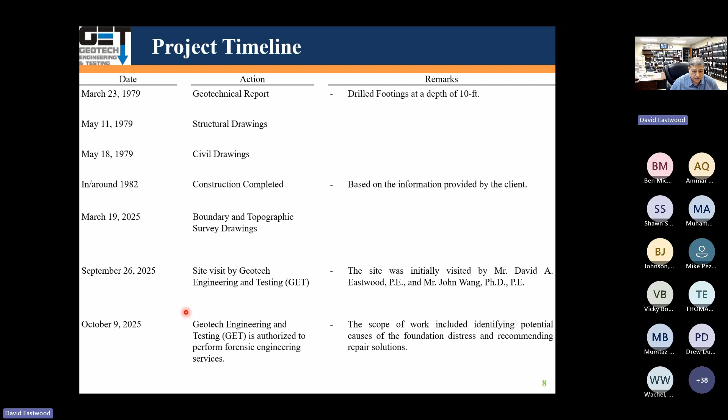There was another new boundary survey done in 2025, and we got involved because the school district came to us and said, hey, we have a lot of foundation problems, floor slab problems, a lot of cracks in our building, what's going on? So we went out there and got involved in September of 2025, and we've done site visits many times during our investigation on this project.

These are some of the pictures of the exterior of the building. Had cracks in the bricks, cracks in the concrete, a lot of separations in the joints out there. It's an expansion joint there, and you can see the joints opening up.

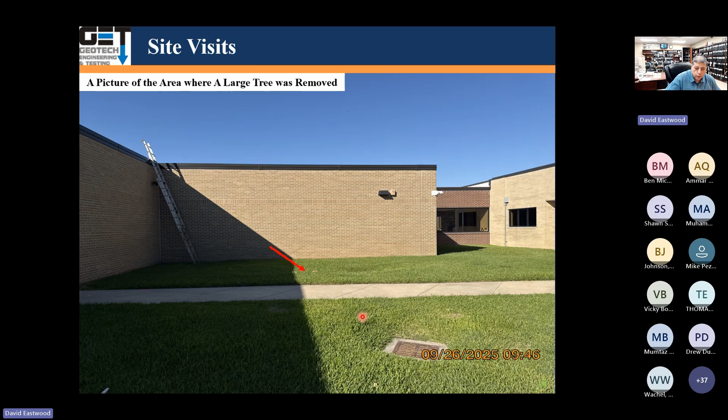There were helical piles. This school was repaired one or two times, and they used helical piles, but they did partial underpinning, so it was not very effective what they did. There was also a large tree taken out on this side of the school, towards the north side of the building. That's where the large tree was taken out.

Some of the columns in the building settled, causing a lot of cracking of the concrete. There were no isolation joints between the columns and the flat work, so there was a lot of cracking out there. That was kind of important.

A lot of the flat work around the school was pretty flat, with negative drainage towards the walls. There were a lot of trees next to the building, oak trees and pine trees. A lot of cracks in the flat work, joints separating, sidewalks settling - you can see the joints. Water was just standing in some of the paving areas due to bad drainage, with no area drains.

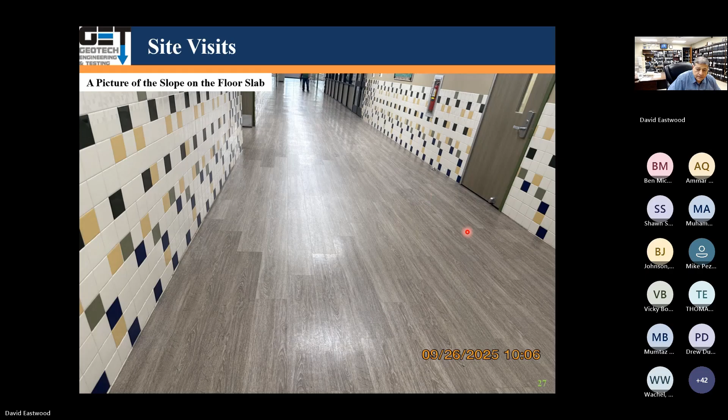Going inside the building, you look at it - the floor slabs were sloping, and there were some bumps in the floor slabs. We had floor slab covering, so we couldn't tell exactly what those bumps were. It could have been curling when they poured the concrete - we couldn't tell, but there were bumps there.

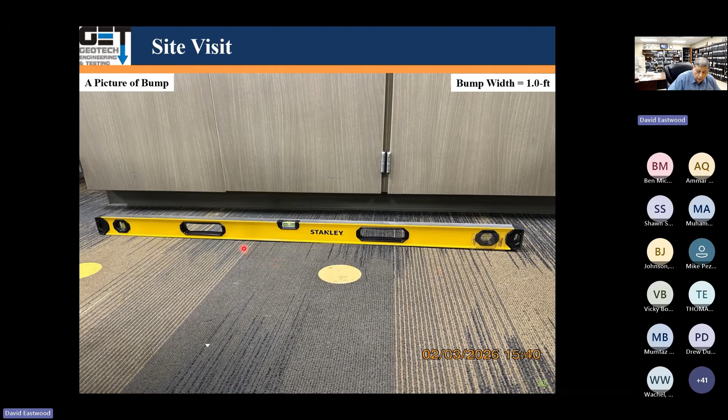You could tell where the bumps were - there was about a half-inch separation in the slab from the high point to low point over a 4-foot ruler, so you can see that's the length of a bump. Again, we put a 4-foot level there, and we could see where we had carpet and where we had these bumps - again, could have been curling.

Floor slabs were not level. This is the length of a bump across the whole classroom. Again, another bump here - you can see half an inch separation. Floor slab not level across the bump.

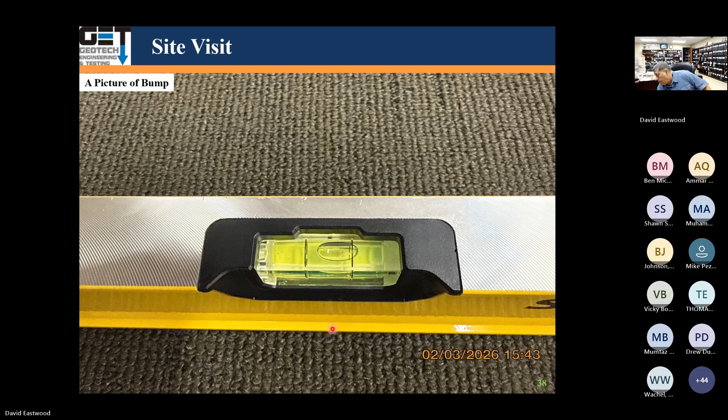You can see here the length of the bump, about 28 feet. Again, you put the 4-foot level in here, and you can see the separations from the high point. That's at various locations throughout the floor slab areas - see that over here. Here's about a 27-foot length of the bump. Here's another bump here.

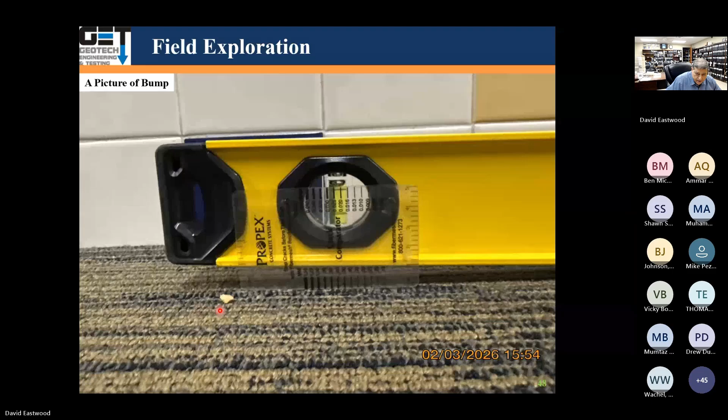The slab was not level across the 4-foot level, along the length of the bump. We had column and sheetrock cracking, and some of the columns were moving.

We had cracks in the sheetrock where the joint was, with some more movement out there at the corners, cracks over here, and more sheetrock cracking throughout the school. This is kind of like the floor slabs.

You can see drill piers. In 1982 they built this thing. I think it was in '79 that they did the geotechnical work. They set the piers, 10-foot piers, on this project.

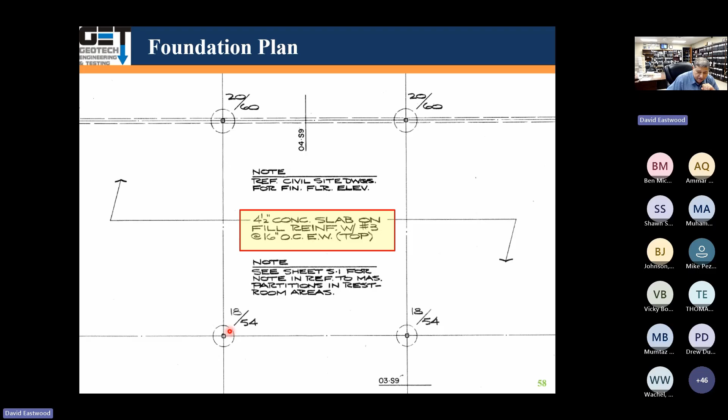The floor slab was only 4.5 inches thick, with number 3 bars at 16-inch spacing. These are 1854s, 18-inch shafts, 54-inch diameter bells, depth of 10 feet.

The initial geotechnical report said piers at 10 feet. It's a drawing, the initial drill piers, 10-foot piers. The exterior beams were supposed to be 24 inches.

For field exploration, we did some GPR, concrete coring, drilling and sampling, tree survey, macro elevations, pier exposures, test pit excavations, and crack surveys.

First thing was GPR went out there, and the GPR covered the building where we could access. We also did coring, where we did interior borings, and we did macro elevations of the school. We did 5 borings inside and then 4 borings outside.

We also exposed the piers at 3 locations: test pit 1, test pit 2, and test pit 3. Then we exposed the exterior beams at 3 locations: test pit 4 and test pit 5.

Let's see if I can find test pit 5. Here's test pit 5 and test pit 6. So we exposed the grade beams and also drilled to see what was actually built.

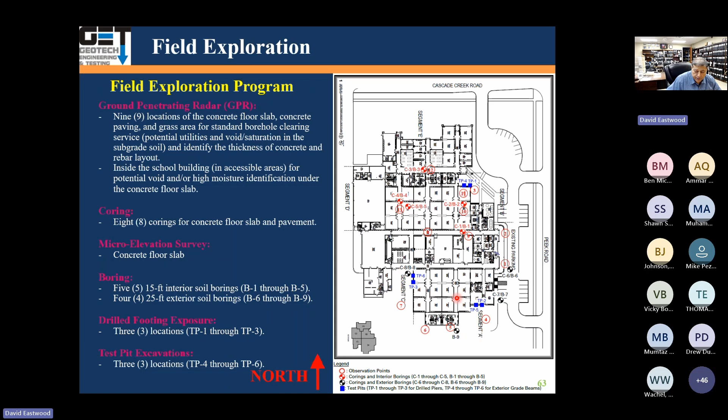GPR uses basically an antenna that transmits electromagnetic energy like a cell phone, located within the antenna. It reflects the signal when it picks up soils with different dielectric values, kind of like different properties.

We did GPR where we did our concrete coring and borings. Also, we wanted to know if there were any utilities out there, so we did GPR both inside and outside the building.

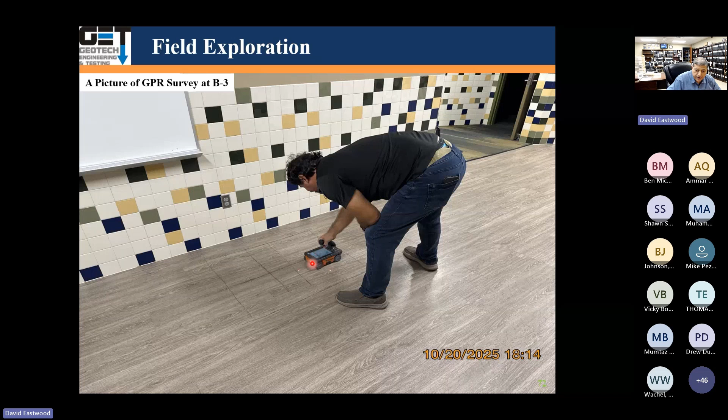This is the boring location, boring B3. These are where the steel locations are, the rebars. Of course, we didn't want to do the borings and coring where there was no rebar.

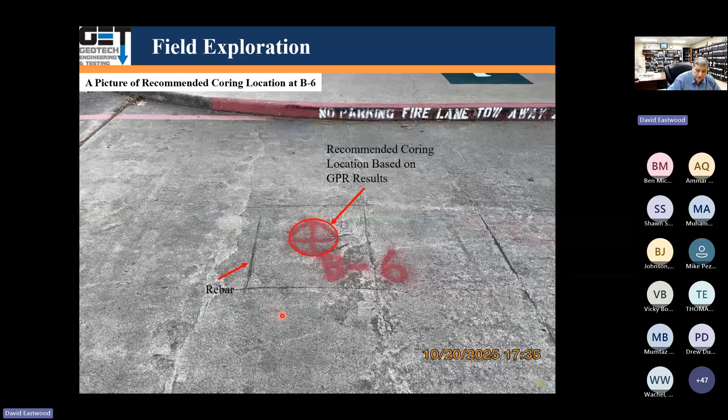B6, that's in the parking lot. Rebar locations, this boring location. That's B6, we did it over here, that's where the rebar is.

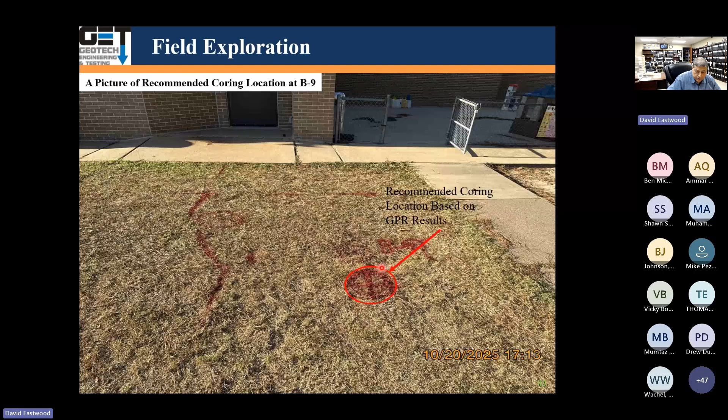We did one in the middle where there's no rebar, and one in the grass, making sure there was no utilities underneath it. That's B9. We cored the concrete inside and outside.

The concrete was supposed to be 4.5 inches. In some areas it was like 4 inches, some areas was like 5 inches, 5.5 inches.

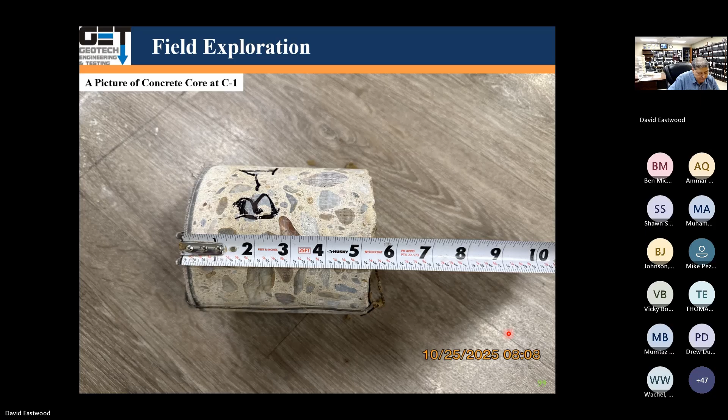We saw some voids underneath the concrete. The pad underneath the slab was like 2-3 feet thick, and the pad settled with time. The school was built in 1982, so it's pretty old - 40, 50 years old.

So with time, some of these older structures, the pads will start settling and creating voids underneath the concrete slab, and the slab starts sagging and dropping. You can see the void in the pad, the separation between the concrete slab and the pad. Here's the void.

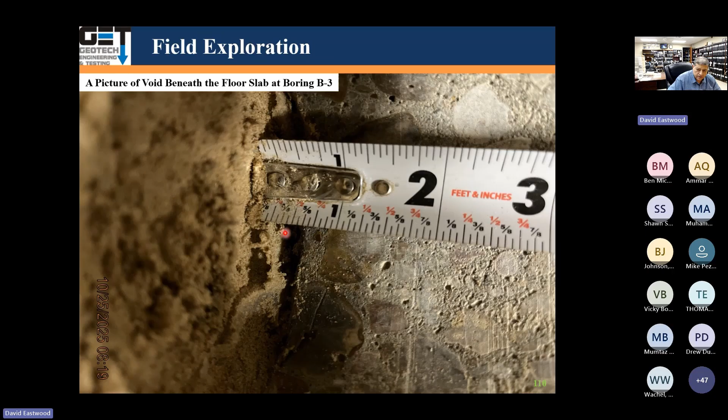There were some areas where there was no void. We got our portable rig - it's a gasoline operated portable rig that we have, and can do borings up to 20 feet deep inside the building. This is our own rig, so we get out there and do the borings, get soil samples all the way down.

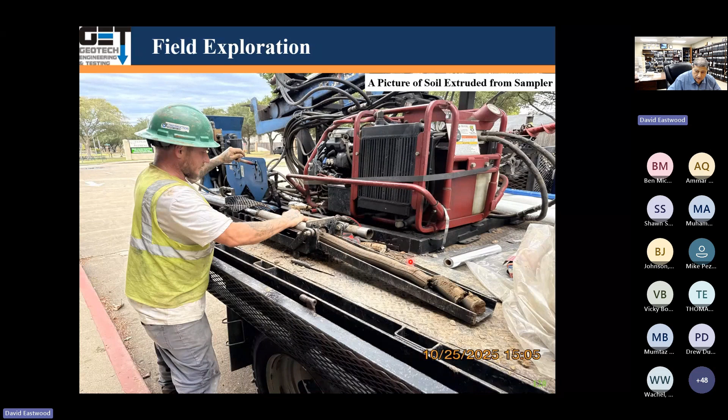We extrude the samples, the soil samples - you can see the sandy clay soils coming out. We did have some fat clays too, gumbo clays, but mostly sandy clays. We measured the water level inside with a tape measure with a weight at the end of it.

We threw it in the hole when it said plumb - that's where the water was, but we didn't find any water in any of the borings where we did. No groundwater. We did borings outside with our truck rig.

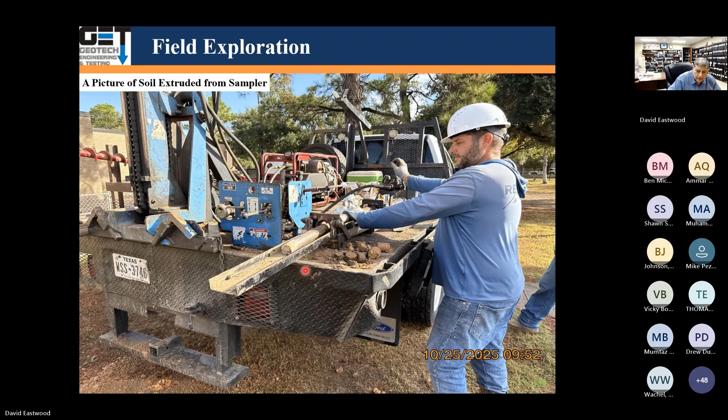The borings outside, I think, were 20, 25 feet deep. We stored the samples, measured the water levels, and we hit no water anywhere inside or outside, no groundwater.

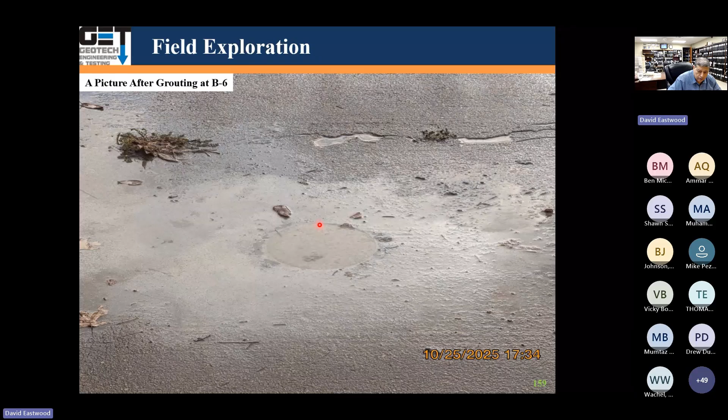After we finished, we mixed the non-shrink grout and grouted the holes from bottom up, making sure the holes were filled with concrete. We probed the holes to make sure none of them would settle or have any problems. Everything was grouted.

This was the building here. We had a lot of trees on the north side. A lot of them on the east side, and some trees on the south side.

If you look at the elevation data, you see the east side of the building is settling. The edge is dropping. There are a bunch of pine trees here, and you can see the pine tree. In the parking lot, we have some oak trees as well.

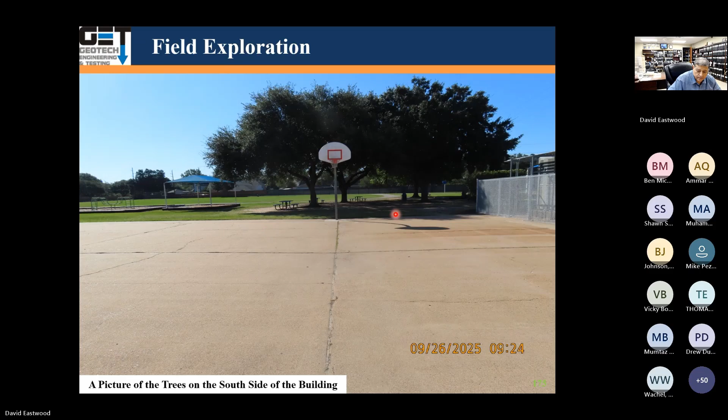This is northeast of the building. This is southeast of the building, where we had some oak trees and pine trees, near the building. This is the south side of the building. We did micro elevations to evaluate the

We got actual elevation measurements here. It's kind of hard to see, but you can see the contours in here.

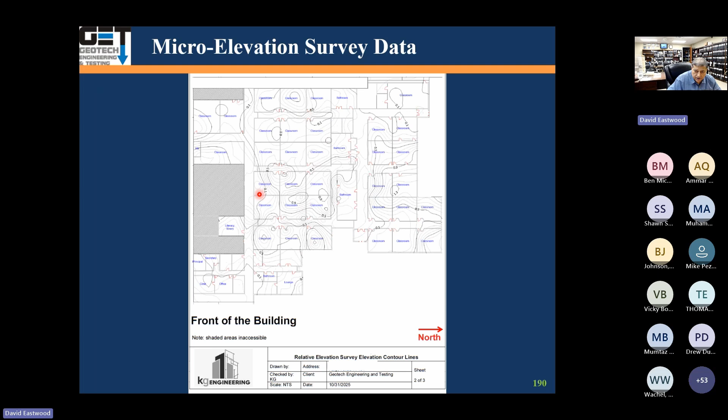So the edge is dropping over here. On the north side, elevations were higher. You can see a lot of shrinkage here. Here there's some heaving, some settlement. Here, the center is kind of heaving.

We also exposed the piers at test pits. For the piers, we used test pits 1, 2, and 3 — those were exposed piers. Test pits 4, 5, and 6 were used to check the grade beams.

For the piers, we wanted to measure the depth of the drilled piers, the shaft size, and the bell size. For the grade beams, we wanted to measure the depth of the grade beams and their width, and compare all that to the design drawings.

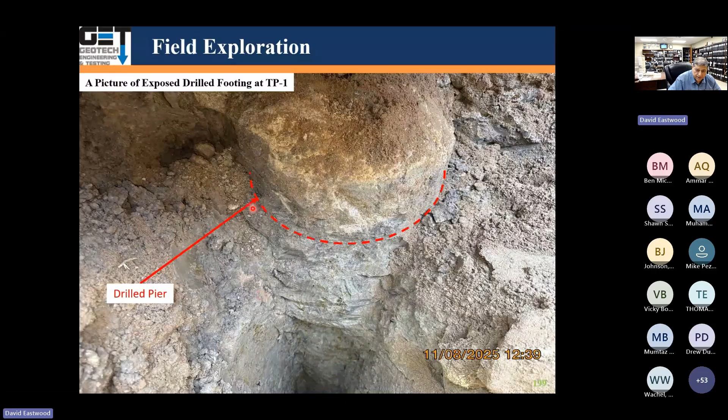We started excavating at various locations around the building, opening test pits. We exposed the drilled piers — you can see the piers here. We had good connections between the pier and the grade beams. That's where the pier is. That's test pit number 1.

Here's a shaft diameter of 16 inches, that's test pit number 1. You can see the drill shaft here. We measured with a rod to find where the bell was. This is the drill shaft, and here's the bell, the tip of the bell.

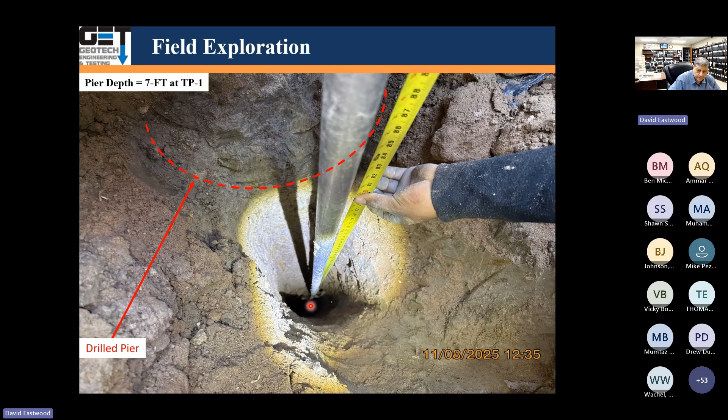The grade beam was 24 inches, at test pit number 1. We measured the distance between the shaft and the tip of the bell — here it's 13 inches. The bell is 42 inches in diameter.

We found a gap between one of the piers at test pit number 1 and the bottom of the grade beam — I think it was about an 8-inch gap right there between the top of the pier. The pier was just sitting there, and the grade beams were not resting on top of the piers.

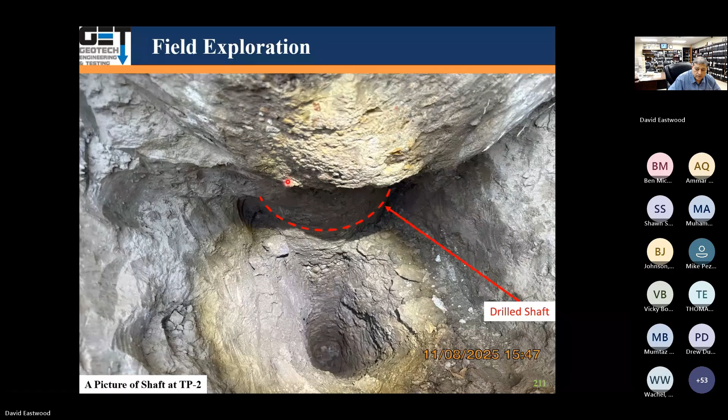Here's the drill shaft right there, and you can see in test pit number 2 a picture of the pier shaft. That's test pit number 2. The pier's depth was only 8 feet, while the design called for 10 feet.

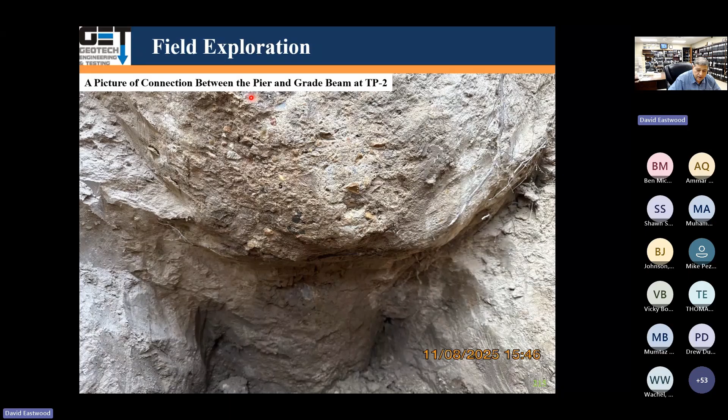The grade beam was 24 inches. The diameter of the bell at test pit number 2 was 32 inches. This is the pier, and here's the edge of the bell. There was a solid connection between the grade beam and the pier at test pit number 2.

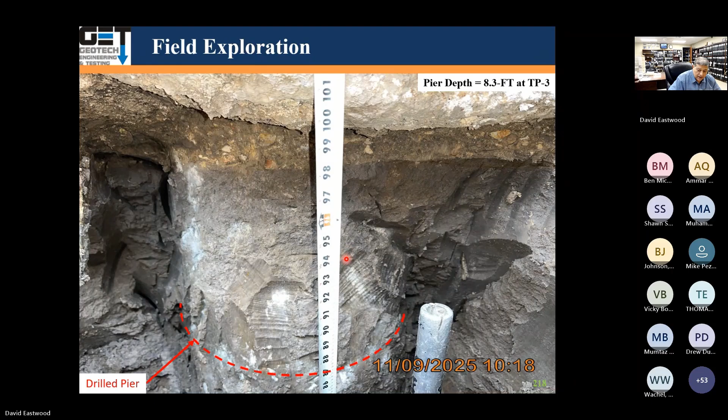At test pit number 3, the shaft was 17.5 inches — that's the shaft there. The pier was 8.3 feet deep at test pit number 3, while the design again called for 10 feet. The grade beam thickness was 24 inches at test pit number 3.

The bell was 32.5 inches, so it was undersized. The connection between the pier and the grade beam was good.

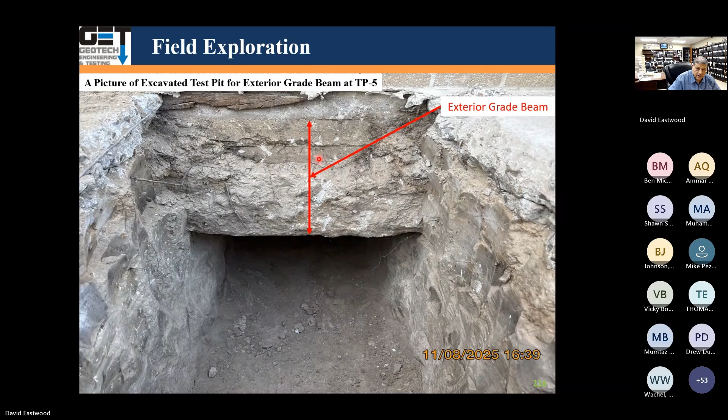Test pit excavation for exterior grade beams: we excavated exterior beams at test pits 4, 5, and 6 to check the beam thickness and width. Here we measure test pit number 4, test pit number 5 again, exterior beam, and test pit number 6.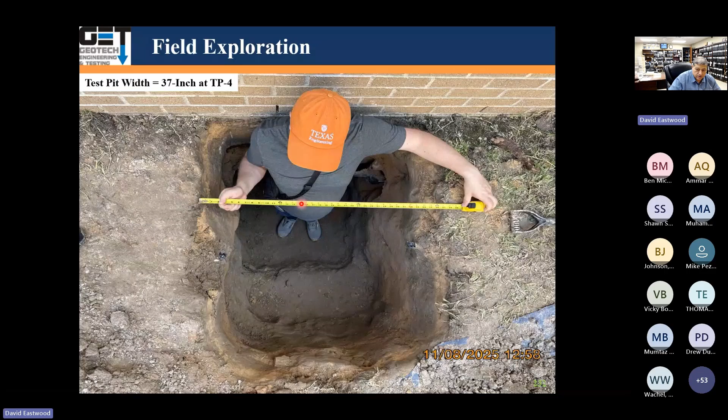That's the bottom of the grade beam. You excavate, you go underneath it. That's what you get. The width of the excavation was 45 inches. Here the test pit was 37 inches. The depth was 58 inches, with depth of the excavations.

We found a piece of helical pile here at test pit number 4. I guess they tried to repair the foundation. That's a bracket for a helical pile. It's not engaged with the beam. There's a void here between the bracket and the beam.

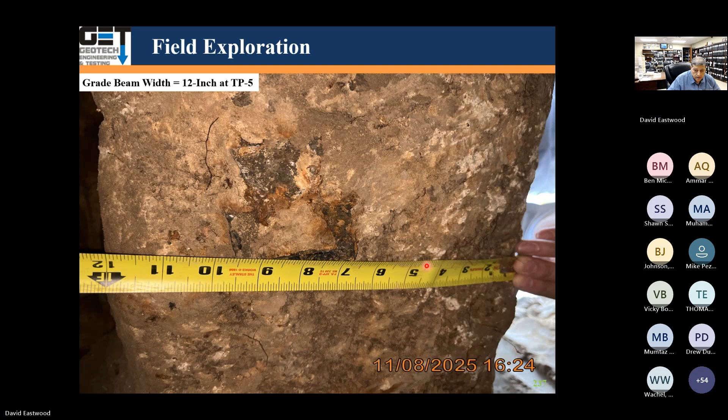This is test pit number 4, 5. You saw the beam depth of 24 inches. This is the bottom of the beam, and test pit number 5 was 12 inches wide. Again, the excavation was 40 inches, 34 inches, test pit number 5. Excavation was 46 inches, test pit number 5.

The exterior beam was 12 inches. At test pit number 6, it should have been 24 inches. The grade beam width was 15 inches at test pit number 6. The excavation was about 39 inches. The width was 35 inches and the depth was 50 inches.

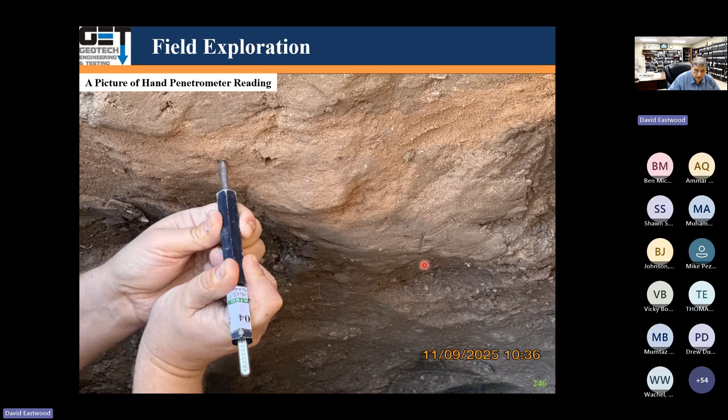Test pit number 6. We use a hand penetrometer and check the soils at the bottom of the grade beams, to see what kind of strength it has. And backfill the area. After compaction, we use a jumping jack to compact everything. Backfill all the holes. And pour concrete where we excavated in the concrete.

So test pit number 1, we had soils: lean clay 0 to 14 inches, 14 to 36 inches we had sand, below that he had lean clay. The pier was only 7 foot at test pit number 1. Bell size was 42 inches, design was 48 inches. The pier depth was 7 feet, supposed to be 10 feet.

Shaft was 16 inches, that's okay. Exterior beams were 24 inches, that meets the design. Basically, there was no connection between the pier and the grade beam. There was an 8-inch void between the top of the pier and the exterior grade beam at test pit number 1.

Test pit number 2, 0 to 48 inches was lean clay, 48 to 120 inches was lean clay. The pier depth was 8 feet. It should have been 10 feet.

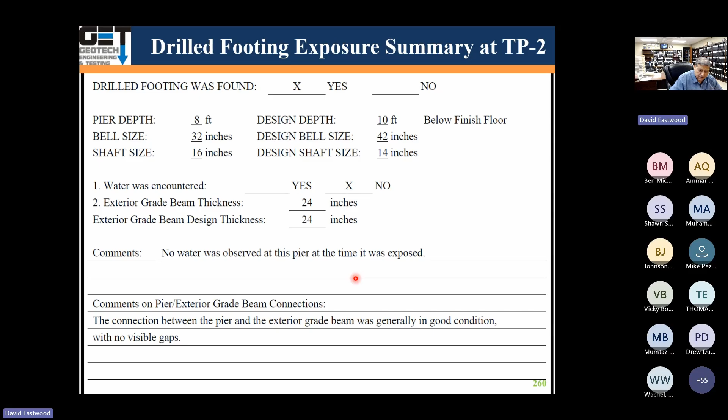The bell is 32 inches, it was supposed to be 42 inches. Shaft was 16 inches, it was supposed to be 14 inches. The exterior beams were 24 inches, that's just fine. There was good connection between the exterior grade beam and the piers.

Test pit number 3, from 0 to 12 inches was lean clay, from 12 to 112 inches was fat clay, gumbo clay. The pier was 8.3 feet deep, supposed to have been 10 foot deep. The bell was 32 inches, was supposed to be 48 inches. Shaft was 17.5 inches, supposed to be 16 inches.

The exterior beam was only 12 inches, supposed to be 24 inches. And they had good connections between the pier and the exterior grade beam.

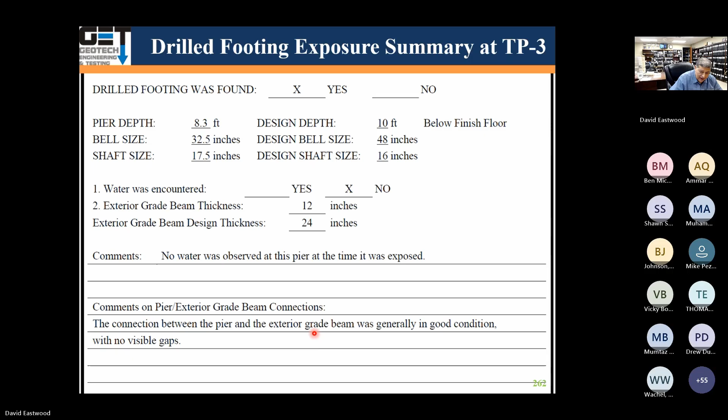This is test pit number 4. 0 to 2 inches we had lean clay, 2 to 4 inches we had sand, below that we had lean clay to 14 inches, 14 to 24 inches we had sand, below that we had lean clay.

The grade beam was supposed to be 24 inches, which it is, 24 inches. The beam width was 9 inches, the design was 10 inches.

That's test pit number 5. 0 to 46 inches was sandy lean clay. The exterior beam was 24 inches, which is fine. The width was 12 inches for the grade beam. Design was 10 inches.

And test pit number 6, 0 to 50 inches was lean clay. We had exterior grade beam of 12 inches. The design was 24 inches, so it was all deficient.

Remember, moment of inertia is a cubical function of grade beam depth. So when your beam is 12 inches thinner than it was supposed to be, that reduces the stiffness of the exterior grade beam significantly.

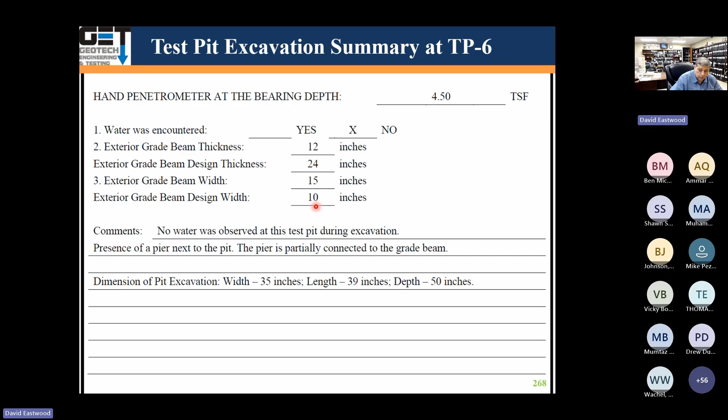The exterior beam width was 15 inches. The design was 10 inches. There was no water in there.

Crack survey, we went throughout the whole building. We had a lot of cracks on the east side where the trees were. We had cracks and bumps all over the place.

So there was a lot of cracks out there and a lot of bumps. We measured a lot of the crack sizes and the lengths of cracks. Measured the lengths, widths.

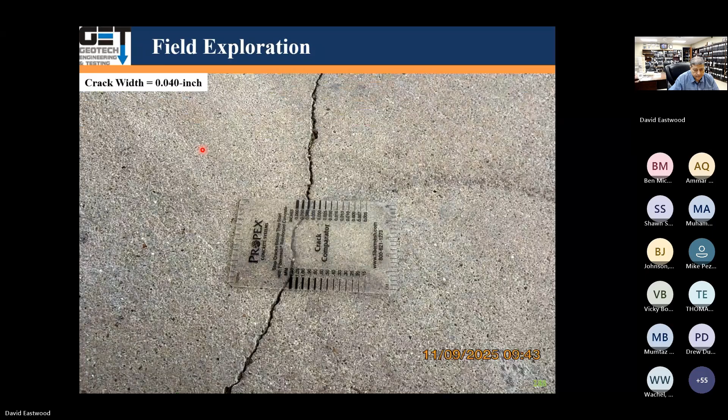A lot of hairline cracks, about 0.040 inches.

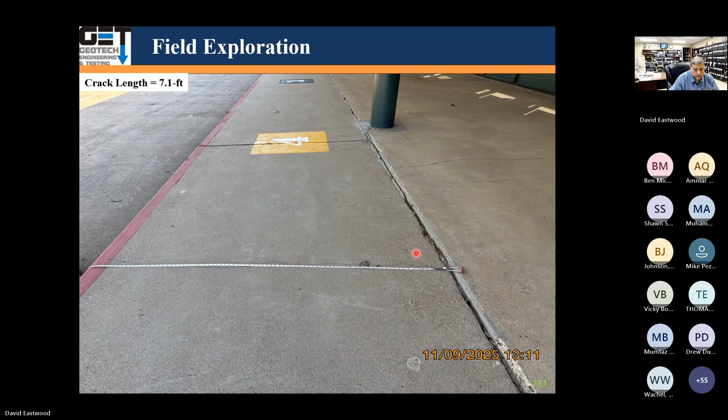Definitely, they didn't put enough control joints in the concrete, especially in the flat work.

The crack here is 0.05 inches wide, 7.1 feet long. So there were a lot of cracks all over the place.

We did laboratory testing, including the classification test, soil strength test, Proctor compaction test, particle size analysis, concrete compression test. The soil stratigraphy from the borings indicated we had concrete.

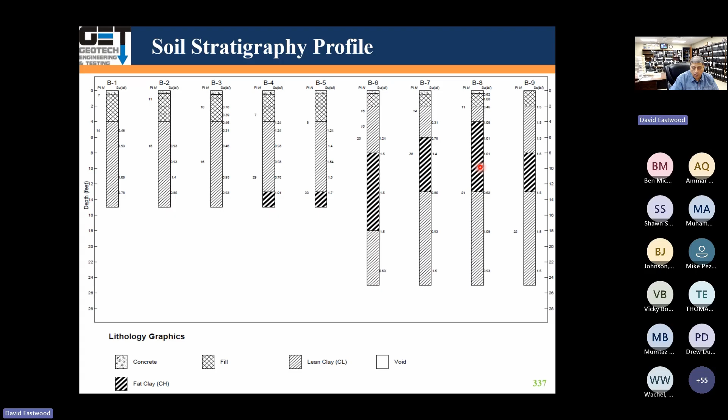Below that, we had fill. Below that, lean clay. In some areas, fat clays, gumbo clays in some areas, and in some areas voids. We had about 6 inches of concrete in some areas, then a little bit of voids, about 0.6 to 0.63 inches. Below that, lean clay, then silty sand, then silt, then lean clay. In some areas, from 4 to 18 feet, we had fat gumbo clay. So we had very variable soil conditions.

Some areas had PIs of 7 to 11. The sands had no PIs. The lean clays had PIs between 8 to 29. Fat clays had PIs between 33 to 38. The strengths were okay.

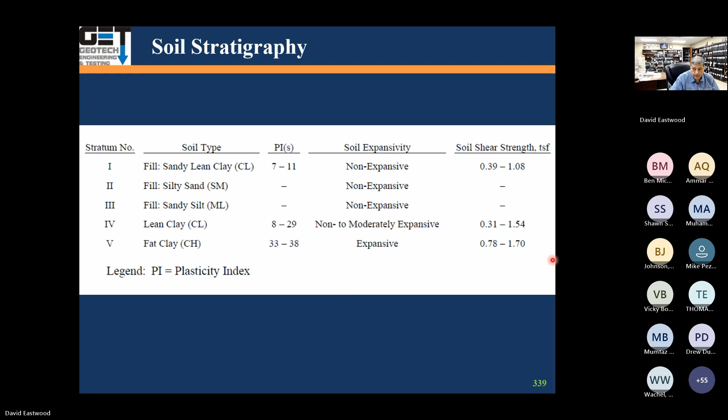These are typical boring logs. Boring B1: 5.4 inches of concrete, below that sandy lean clay to a depth of 4 feet, then sandy lean clay all the way down to 15 feet. This is an interior boring.

Boring B2: we have 4 inches of concrete, below that about 0.6 inches of void, below that silty sand, below that lean clay, then a bunch of fill all the way down about 5 feet. So we had a lot of fill. PI in the lean clay was 11, 15.

Boring B3: about 5.5 inches of concrete, below that 0.63 inches of void, below that silty sand, below that sandy lean clay, below that lean clay, with PIs of 16, 10.

B4: 6 inches of concrete paving, below that a couple of feet of silty sand, below that sandy lean clay, below that lean clay with PIs of 29 and 7.

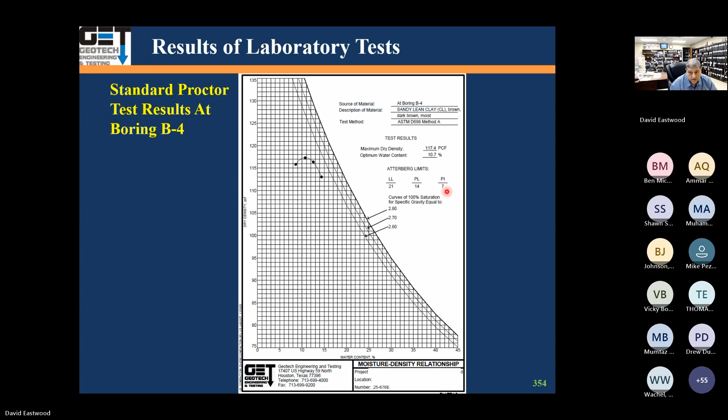Here's another one: lean clay again, PI of 7. Dry density 117 and 10.7.

We did some grain size analysis on this. We got the number 200 sieve, and we can see more than 50% passed, about 56%. So basically sandy lean clay.

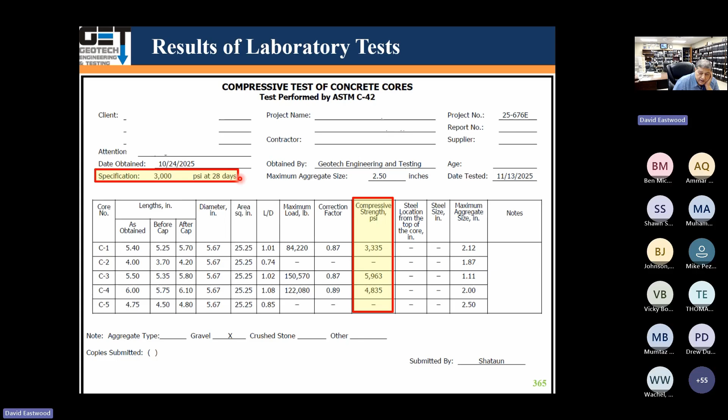Concrete compression test: we took the concrete cores that we cored on the floor slabs and put them in a compression machine, broke them up, and saw what kind of strength we got. We got values of 3,300, 5,900, 4,800. The spec called for 3,000 PSI at 28 days, so your concrete passed strength, it was good.

We checked the aerial photos. We did engineering analysis, aerial photos, review of the topographic map. We looked at the macro elevations, the field compaction. We checked for water, perched water tables, soil moisture profile, and liquidity index. We checked the rainfall data, GPR data, slab thickness, strength of the concrete, crack survey, and pier depths.

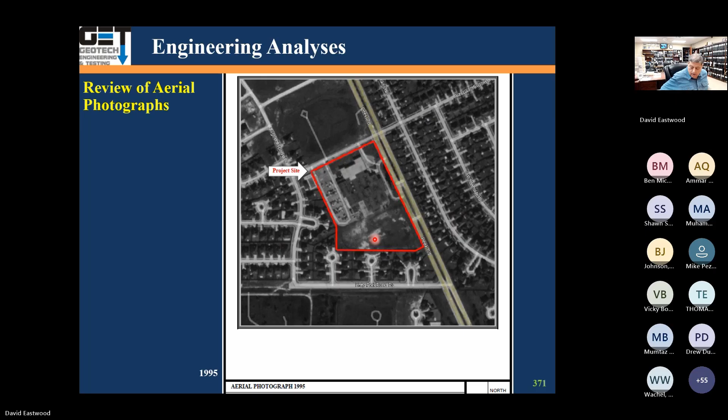Lots of residential developments around the property. It was flat. There was nothing out there.

We look at the elevations on the basis of what the PTI, Post-Tensioning Institute, talks about, relative elevations of slab on ground foundations.

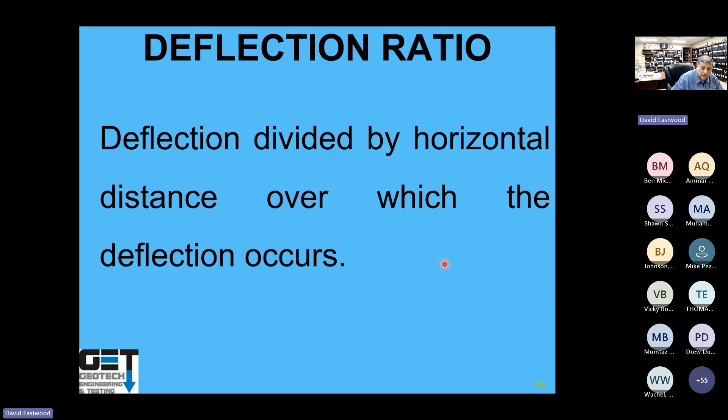Couple of definitions. Deformation is changing shape of the foundation from after original foundation construction. Deflection is a maximum deviation from a straight line between 2 points. And deflection ratio is deflection divided by horizontal distance over which the deflection occurs.

Another concept called tilt is basically a planar rotation measured over the length or width of a foundation. So tilt is y, the actual movement, over x, the horizontal distance.

So the allowable tilt is about 1% by ASCE. The actual deflection on a slab that we can tolerate in general is L over 360, that's 1 inch in 30 feet. So your slab is not supposed to be out of level for more than 1 inch in 30 feet. And overall tilt limit is 1%.

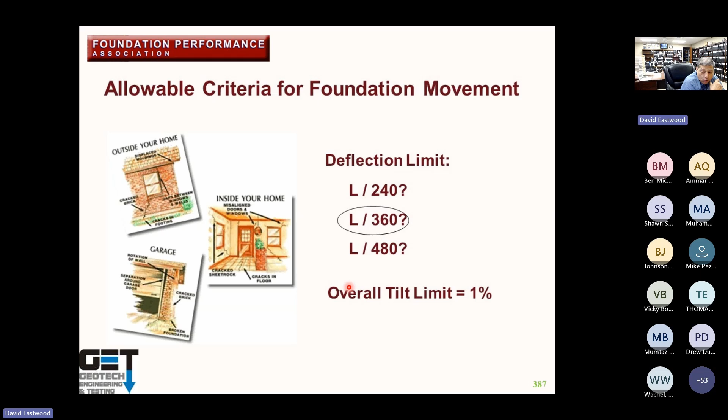So we took 2 sections on the floor slab elevations. Section AA, section BB. See what the floor slabs are doing.

Percent tilt was 0.06%, less than 1%. And all these things were smaller than L over 360, which was less than the allowable deflection. So the slab did not fail.

Here's again the slab in second section BB. You can see a deflection of about 1/2 inch here. Almost 1 inch over a distance from about 130 to about 180 feet, in 50 feet, which is not very much.

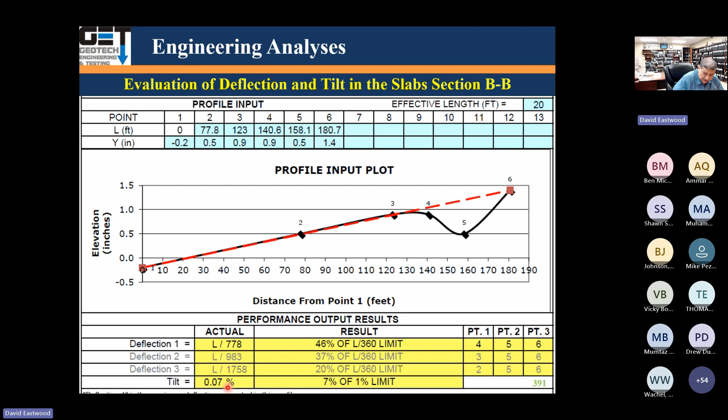So deflection ratios were L over 778, L over 983, L over 1758, which is very small, all smaller than L over 360. Percent tilt was 0.07, which was less than 1%.

The differential movement, section AA was 2.1 inches, section BB was 1.6 inches. That's 2.18 inches over 283 feet. The BB was differential movement over 181 feet, which is very small.

Section AA actual movement that we explained, deflection ratio we measured was L over 918, less than L over 360, so it passes. Tilt was 0.06, less than 1%, passes. Section BB was L over 778, smaller than L over 360, it passes. The tilt was 0.07%, less than 1%, it passes.

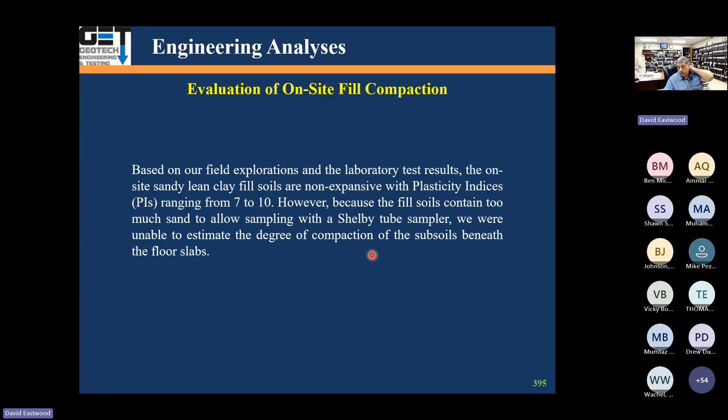Compaction, we could not get a good sample of the soil under the floor slab because the soils were very sandy. It kind of fell apart. So we couldn't get a good sample for checking compaction.

Perched water table, we checked the boreholes in the floor slab areas. We didn't see any standing water, so there was no water under the floor slabs, no perched water.

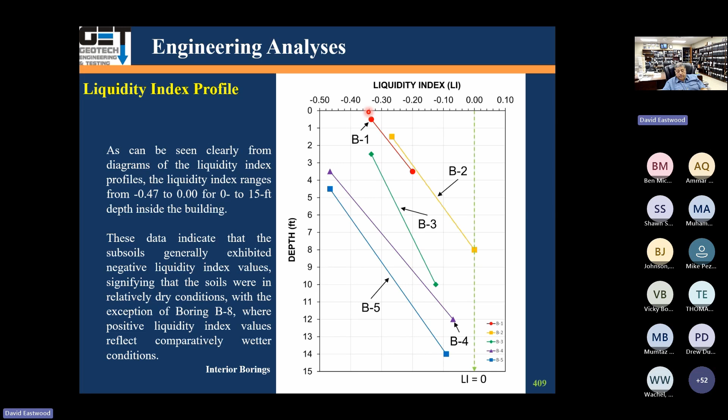Rainfall data. We looked at the rainfall data during the construction of the building. In 1982, we had about 40 inches of rain. In 1981, we had 46 inches. In '83, we had 45 inches. Overall, those years the rainfall was a little less than our average rainfall of 50 inches. So the soils were dry when they were building this school.

When they took the tree out on the side of the building in 2017, we had rainfalls of 56 inches, 54 inches, and 76 inches. That means the soils were very wet at the time the tree was taken out. That area was dry before, so this indicates that potentially where the tree was taken out on the north side caused some heave, because the tree was removed and the soil wanted to rehydrate.

So we also looked at the GPR values, and this is where we did the borings. That's where the steel was, around the GPR near the top here. The red lines indicate conduits 1 to 2 feet below grade. Also, the GPR showed the slab was 5 inches thick.

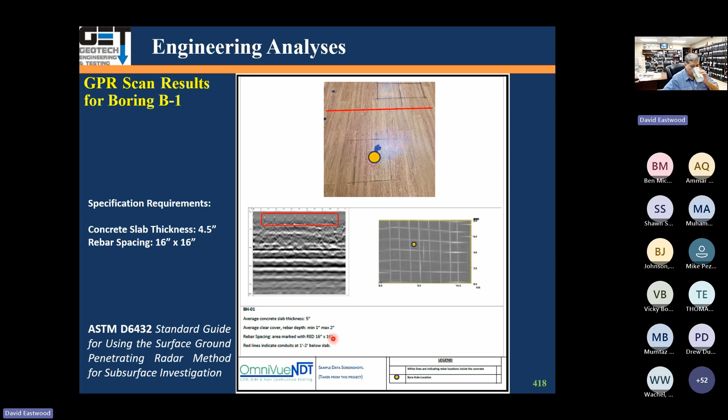Here's boring B2. Design called for a slab of 4.5 inches and steel spacing of 16 by 16. GPR says 5-inch slab, 1 to 2 inches of concrete cover, steel 16 by 16. Red line indicates conduits.

This is boring B3. It shows a 5-inch slab, 1 to 2 inches of cover, steel 16 by 16. Blue lines indicate saturation - high moisture saturation in these areas.

That's boring B4, same things. Shows red line indicating conduit - these are some conduits here. The steel was 16 by 16, slab 5 inches.

This is boring B5, the same thing - just a 5-inch slab, cover at 1 to 2 inches, 16 by 16 steel.

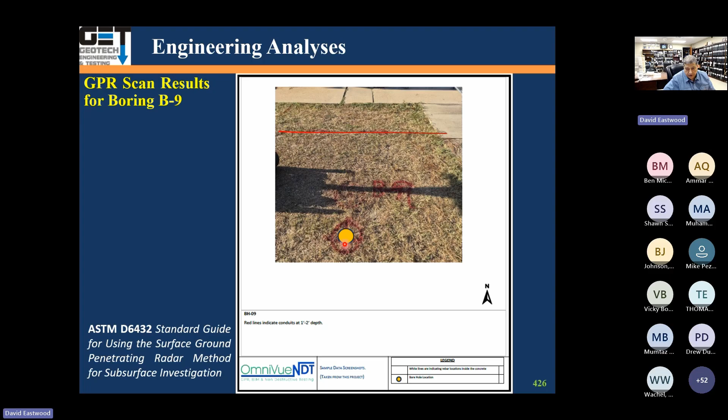That's boring B6. Red line indicates conduits 1 to 2 foot deep, a conduit near the boring. B7, here's the conduit. B8, here's the conduit. B9, conduit right next to it in the grass. We did the borings - the conduit is outside, in a flat work area.

The slab thickness: the design was 4.5 inches, and we measured slab thicknesses anywhere from 4 to 6 inches. ACI 117 says the slab should not be thinner than 0.25 inches or thicker than 3/8 of an inch from the design, but in this case we found areas that were thicker and areas that were thinner. So in general, the slab thickness did not meet ACI 117 specs.

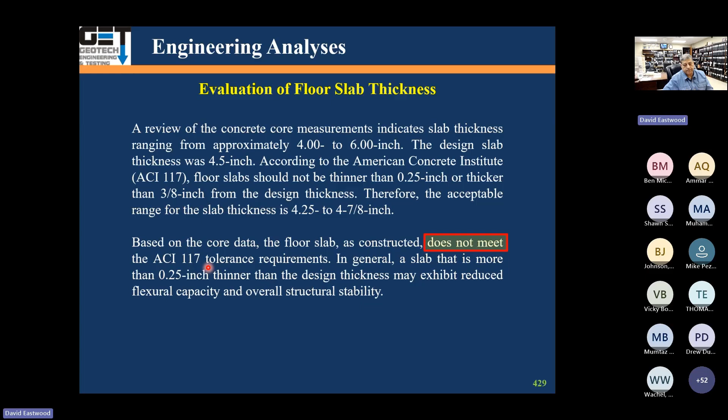Cracks - we found a bunch of cracks all over the place and bumps, mostly on the east side of the building.

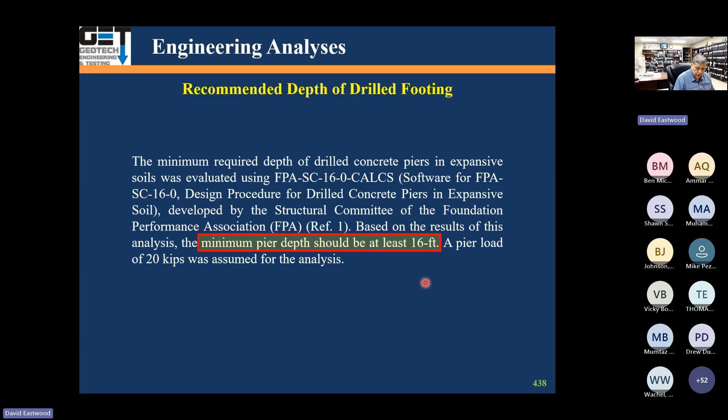Drill piers: we ran a software by FPA, Foundation Performance Association, considering the soils we have on that site and the loading, and assumed a pier loading of 20 kips. We calculated the piers should have been 16 feet deep to resist uplift due to expansive soils. But they designed the piers for 10 feet on this project, so we say the 10-foot piers were not deep enough.

This is the software from FPA. You put the load on it, you put the unsaturated soil mechanics data in there in terms of the depths, the gamma values, the moisture, liquid limits and plasticity indices, and you run it for uplift capacity and also compressive capacity. We came up with a number of 16 feet for the pier depth.

Reason for foundation distress: inadequate design. The designer said the pier should have been 10 feet. It should have been 16 feet.

Improper construction. We had places where the piers were only 8 foot or 7 foot deep, when the design was 10 foot. We had grade beams that were 12 inches thick, supposed to have been 24 inches. The grade beams in areas were like 8 inches wide, but they're supposed to be 10 inches wide. So we had construction problems.

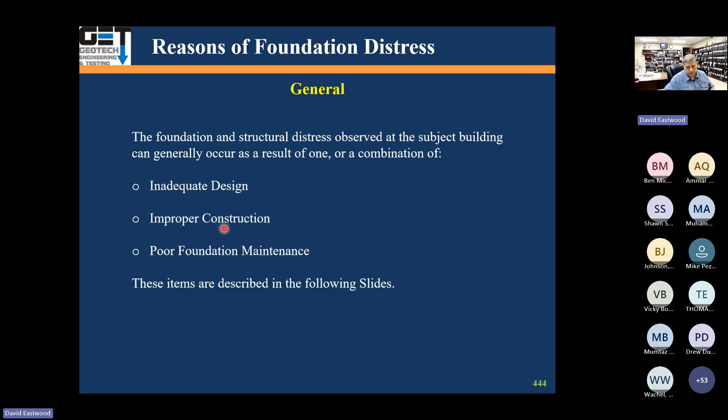Poor foundation maintenance. So here we talked about the pier depths of 10 foot, and we measured stuff a lot less than that. And of course, the design should have been 16-foot piers.

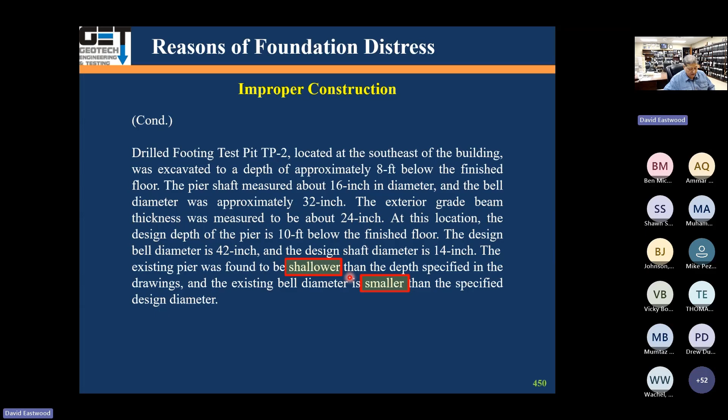Improper construction: the slab thickness varied all over the place. It didn't meet ACI 117 slab thickness requirements. Piers were shallow, grade beams were smaller, the bells were small, so the construction was totally faulty. You had shallow piers, undersized bells. That's a problem.

Also, we had bad drainage around the building. If you go look at the pictures, we had some areas where the water was just standing in flat areas.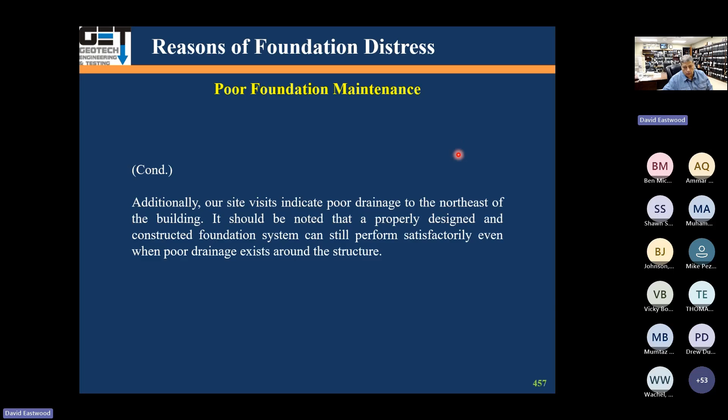So in summary, we had insufficient pier designs. Pier was supposed to be 16 feet, it was only 10 foot. The pier bell sizes were undersized. The shafts had separations, voids, all construction defects. We had large trees causing settlement - that's a maintenance issue. We had negative drainage - that's also a maintenance issue.

In terms of repairs, we told them, let's meet with your structural engineers, discuss our findings, and come up with the repair techniques. In general, we gave them 2 levels of repair - one relatively cheap, one more expensive.

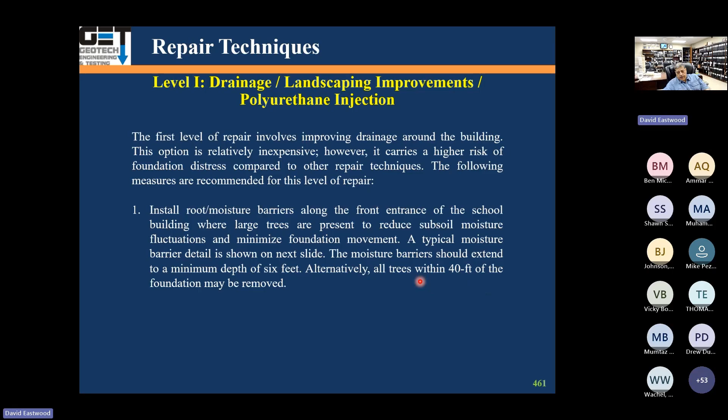If they're going to keep the trees, we recommended putting root barriers out there to a depth of 6 feet. Alternatively, any trees within 40 feet of the foundation should have been cut. They decided to cut the trees and put some crepe myrtles in there. So all those big trees are going to be coming down.

These are root barriers. You put the trees in a root barrier. Root systems grow downward, not laterally. The root barriers, you put them right next to the foundation, all the way down. In this case, we recommended 6-foot root barriers.

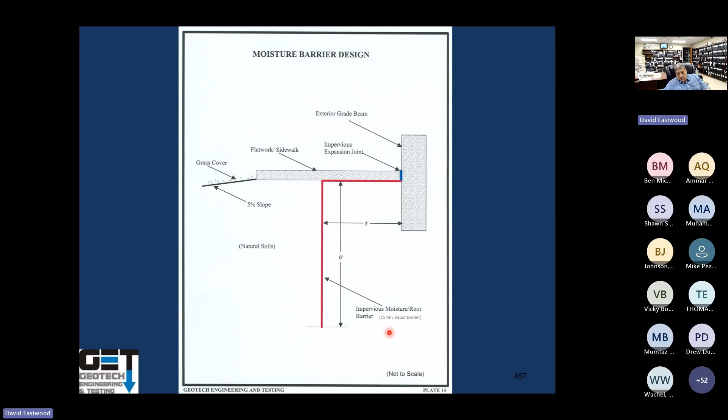And they're using like a 1.5 mil, 15 mil vapor barrier. Ideal depth, of course, for the moisture root barrier is about the 0 movement line - that's a line above which there's movement, below which there's no movement in soils.

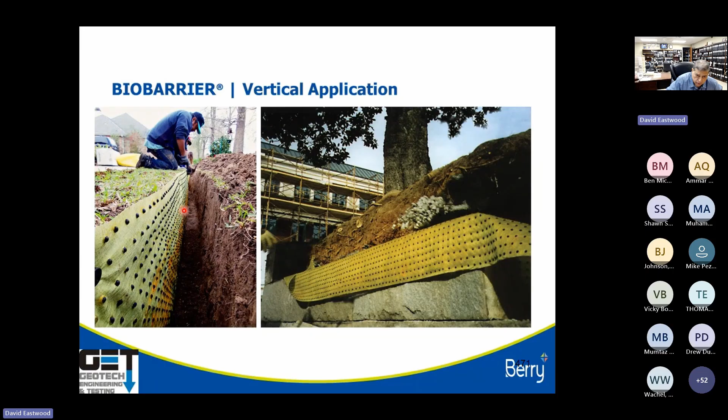Bio barriers, another system - they got herbicide pills. The roots hit them and it stuns them. You can put them vertical or horizontal. That's a horizontal root barrier, and that's a vertical root barrier - it doesn't let the roots extend out. That's a vertical root barrier. It's kind of how you install it.

We also told them to provide positive drainage away from the building. You know, sidewalks should have 2% drainage away from the building.

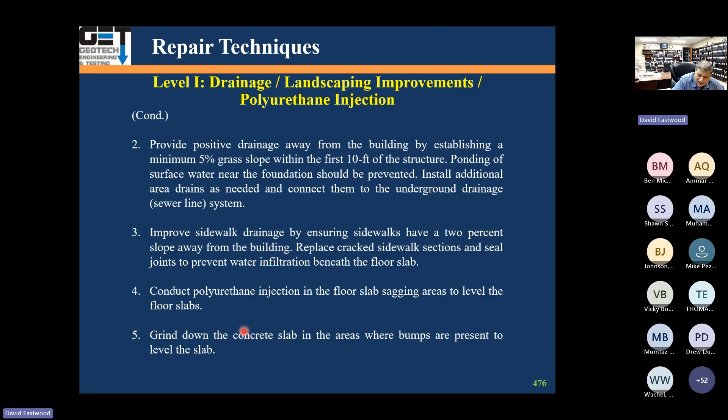We also told them, in the areas of the floor slab that were sagging, to use polyurethane injection to level it, and to grind down the areas where they have bumps. The areas where they had bumps, we told them to grind them down to make the slab flat. The areas that were sagging, we talked about using polyurethane injection under the floor slab to lift it up.

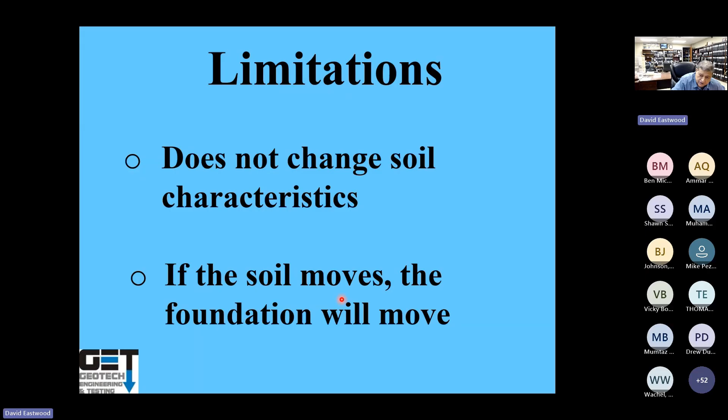It doesn't change the soil characteristics. If the soil moves, your foam will also move as well. If the soil moisture content changes, the slab will move. Basically, if the soil moves, it moves. Moisture conditions from storm sewers and pipes on the slab causes slab movements. Trees will cause slab movements. Moisture changes cause slab movements. Failure to control the foam injected causes bulging and cracking of the concrete slab.

Prior to hardening, water from the overlay wets the foam, which can seep into expansive soils and cause a little bit of movement. High pressure can cause damage or blowouts. If underground utilities are located there, foam can get in and block them and plug the lines.

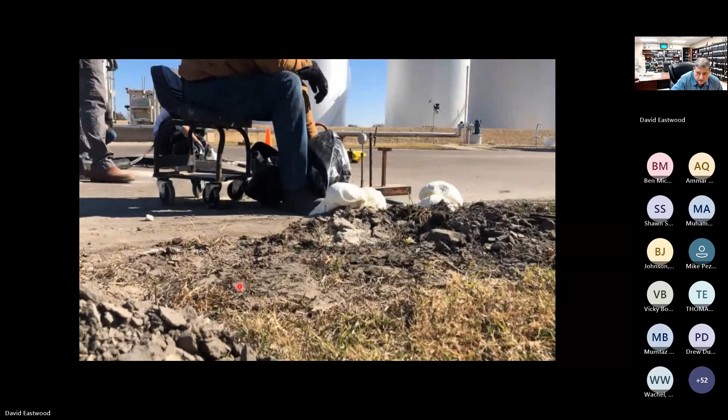There's a video of it. They go out there injecting it. You see the concrete is coming up. That's a polyurethane injection. Some of the foam comes out through the cracks. You're going to have to take them out. That's how it works.

We also told them that especially in the areas where you have columns and walls, we can underpin them, using steel pipe piles to level them. You can do tunneling underneath the floor slabs and put these pipes about 20 feet deep.

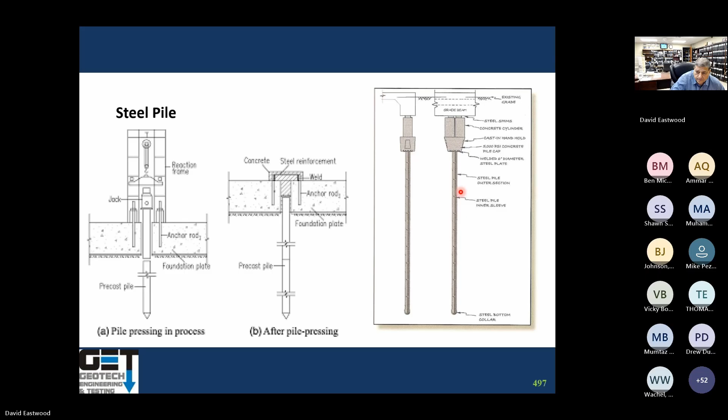And this is what they look like. They're steel, about 2 inches in diameter. You put them in segments, screw them together, and push them down. And it does lift the slab up. You put them underneath the grade beams.

It closes up the cracks. That's the bracket that goes underneath the grade beams. The good thing about steel pipe is you can do tunneling.

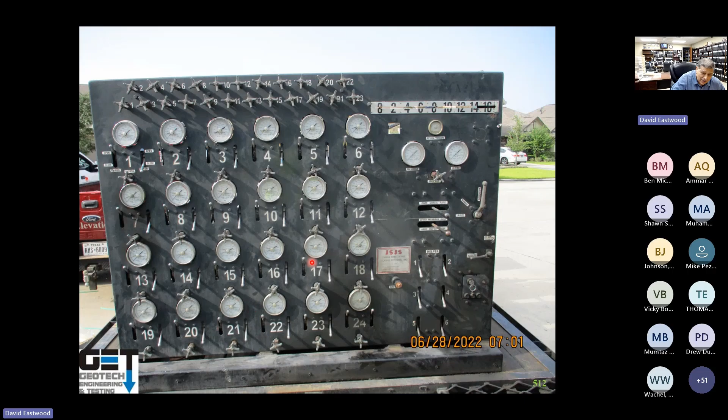Here's a house where they're using steel pipe pile. They put jacks all over the place. You measure the pressures at all locations and do the lift all together. Otherwise you're going to get cracking in the floor slabs. So the whole slab needs to be moving at the same time.

You put a segment in there, put a jack on top of it, and push it against the grade beams. You take it out, put another steel pipe in there, put a jack on top of it, and push it against the beam. Go to a depth of 20 feet.

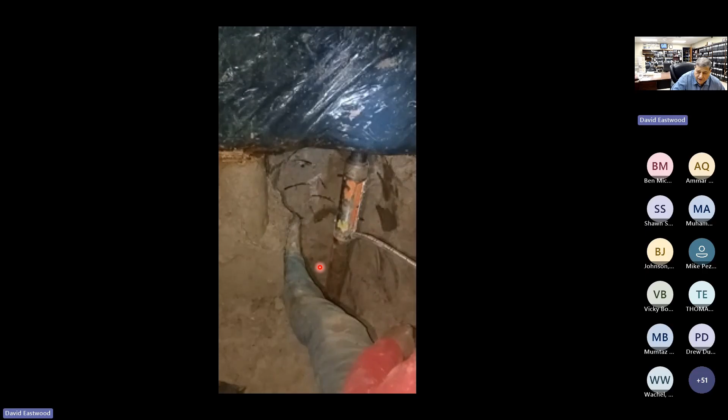Basically there's a small surface area on these steel pipes and piles, and expansive soils cannot pick them up easily. They're easy to install. You can do tunneling underneath. It's kind of expensive.

Push to refusal. A shallow pipe may move up and down if moisture changes occur. If not pushed to the correct angle, the pipe may lay over and bend. If the pipe is overloaded, it can cause the pipe to bend. Improper moisture close to the pile, such as poor drainage or leaking, can cause the pier to move. But if you put it at 20 feet, you don't have to worry about it.

Structural problems are not conducive to steel pipe. For example, if there is insufficient steel in the beam slab, they're not tough enough to resist driving the pile. Sometimes you add a steel beam out there and jack up your slab against the steel beam. If the contractor did not clamp the bracket immediately after driving the piles, the piling will spring back.

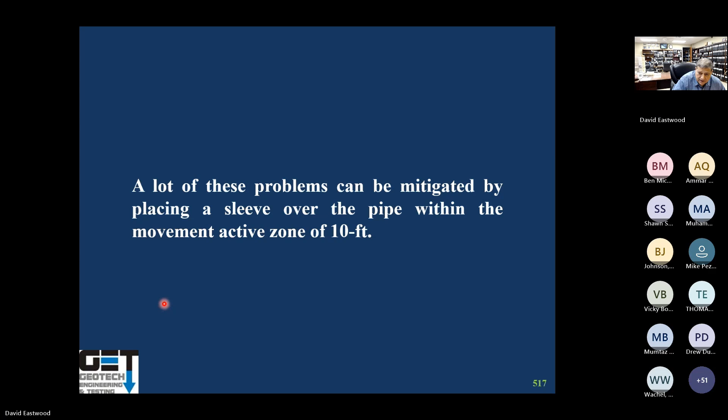Drought can cause loss of skin friction on shallow piles. A lot of problems can be mitigated by placing a sleeve over the pipe within the top 10 feet. In areas with expansive soils, you put a sleeve around the pipe, allowing the sleeve to move up and down while the pipe does not move. That's if you have expansive soils. If you don't have expansive soils, like here, you don't need it.

Tunneling: to install some of these piles, you have to tunnel underneath the floor slabs. These tunnels are usually 3.5 feet by 3.5 feet, or 4 foot by 4 foot. You go in there and dig a hole. You start putting your jack here and push the pile into the ground.

That's the jack. If you don't have a beam, you add this steel beam in there and jack against the steel beam and your slab, okay? You don't jack against the 4.5-inch concrete slab; it will crack. You have to add the beam in there.

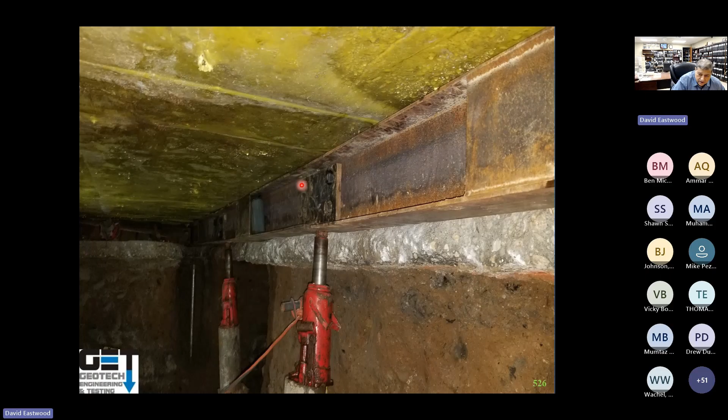Comments? Despite our recommendations, some movement can occur. We recommend, of course, meeting with a structural engineer, conducting a leak test, reviewing the plans and specs, and writing specifications for the repair techniques. Questions?